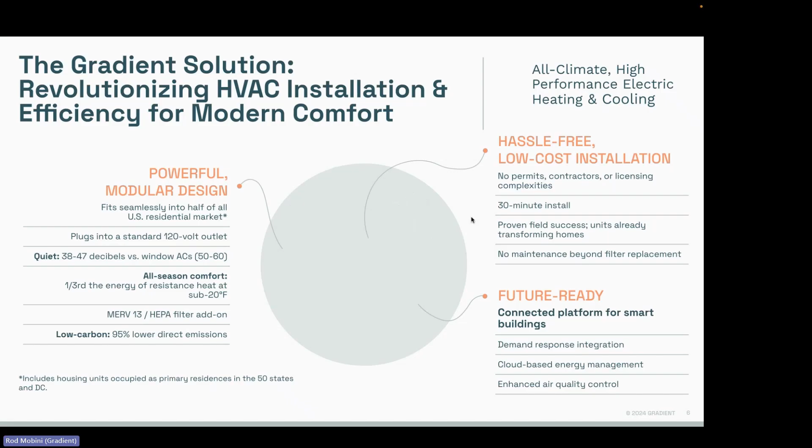This is our second generation product. It's called the all-weather 120 volt window heat pump. Like Bryant said, it brings together all of the functionality and power and user experience of a mini split heat pump with the ease of installation and lower expense of a window air conditioner. We really designed this with users in mind, not only the end users, but the building owners, the installers, the contractors, and spent a couple of years just learning about the needs of these different stakeholders.

All the feedback from our users and our customers resulted in a powerful and modular system that can be installed in over half of the windows in the US market. It's plug and play into a 120 volt outlet. Doesn't require any professional installs. It's extremely quiet, especially when compared to a window air conditioner that rattles your window. We've put a lot of time and effort there. It's rated down to -7 degrees Fahrenheit and is good for cold climates.

It's also industry leading for its air filtration in this product category. We've added MERV 13 filtration, which is the minimum requirement for schools, and it also goes to our purpose as a company. It's better for the planet too. It's approximately 95% lower direct emissions as a result of better refrigerants and a much more efficient system.

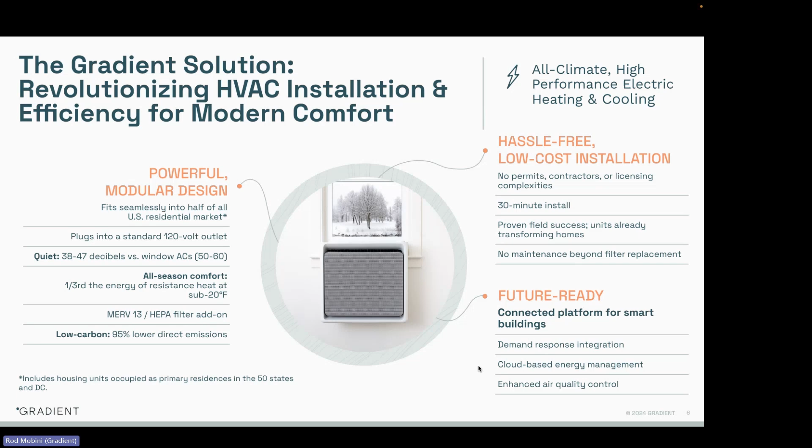And then the maintenance is extremely easy. There's an air filter and a condensate filter, and those are really the only regular maintenance that you would need to do on a unit like this. And these are also connected units, not only connected to the internet and to the cloud, but they can also connect to your building and to utilities to make this the smartest and best solution for our customers.

So just to go through a few of the features, you can see one of our installs here. This is actually at a NYCHA facility at the upper right. You can see this is the outdoor unit. Like I said, 30-minute install, no HVAC contractors required.

It's designed for cold climates, 9,000 BTU in both heating and cooling. It is a heater and a cooler with no resistive heating for space heating. And it can accommodate variable window depths. It also is using variable speed compressors and fans, so that makes it very, very energy efficient.

We've also designed it so that it doesn't take up the window. It hangs just below the window on the indoor side so that you have all of the natural light that you had before installing our unit as well. I mentioned it's 120 volts for a 15 amp outlet. So in most US construction, that's just your typical 120 volt outlet.

It won't require service interruptions, really is not a big nuisance to the residents to install, and it only takes like an hour of their day, and no drilling or permitting necessary. And we're using the best in class, or the best allowable refrigerant for the climate and for efficiency.

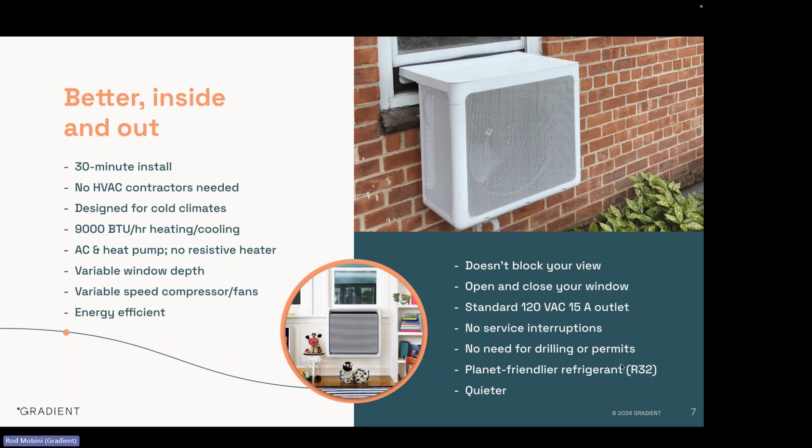Again, just highlighting a few more of the features of this product. It's about a 24-inch by 24-inch square on the inside and on the outside. The depth on the inside is about 8 inches, and the depth on the outside is about 14 inches. So the outdoor unit is a bit larger. We've put most of the internal systems on the outside of the unit.

The overall weight of the entire unit is approximately 125 pounds. The noise I mentioned earlier goes all the way down to 38 decibels at a 1 meter distance. For the electrical considerations, we recommend installing in a 15 amp circuit, but it won't consume more than 12 amps. And we provide a 6-foot cord already with the unit.

The unit also will have mobile app control, scheduling, and BACnet compatibility. It has cooling, heating, and fan-only modes. Again, 9,000 BTU heating and cooling. And then most importantly here, the energy efficiencies that we have rated so far.

These are relatively conservative at this point, but at 47 degrees Fahrenheit, we're getting a coefficient of performance of 4. So for every 1 watt of electricity in, it's 4 watts of heating out. That's equivalent to saying 400% efficient. At 17 degrees, 260% efficient. At 5 degrees Fahrenheit, 235% efficient. And at -7 degrees Fahrenheit, still 171% efficient.

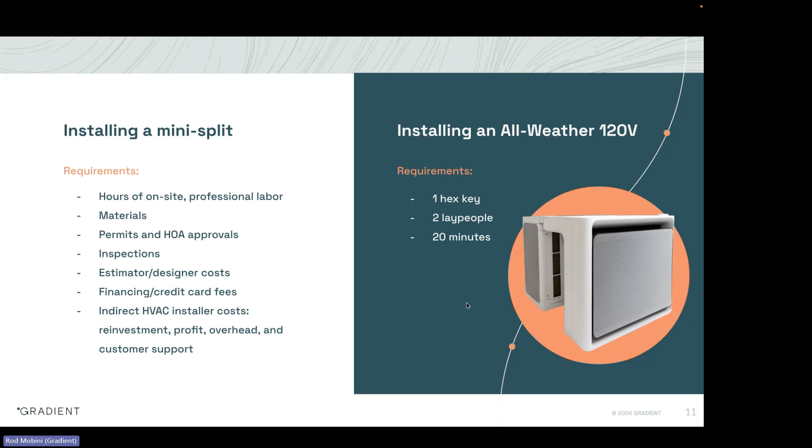So you can see the requirements of installing a mini split compared to our all-weather 120 volt are just incomparable. So just to show you now a visual of what an install looks like. You can find this video on our website as well, but I'll walk you through it here. So that's when it's fully installed. The unit will come in a box and you'll be able to unbox it, as you can see here.

Oh, pardon the Wi-Fi issues.

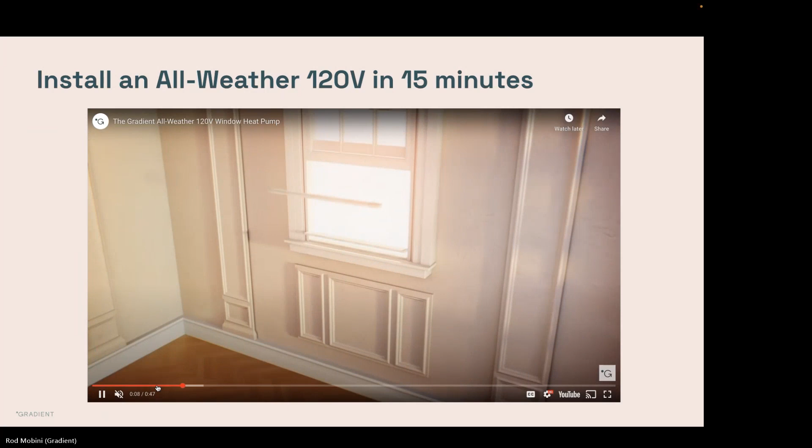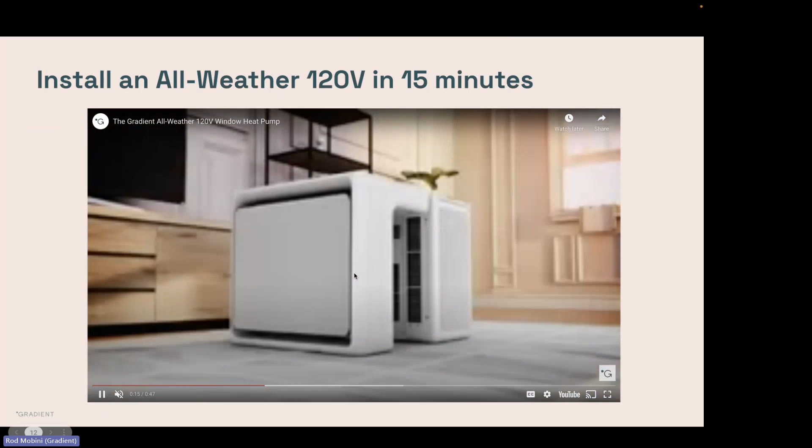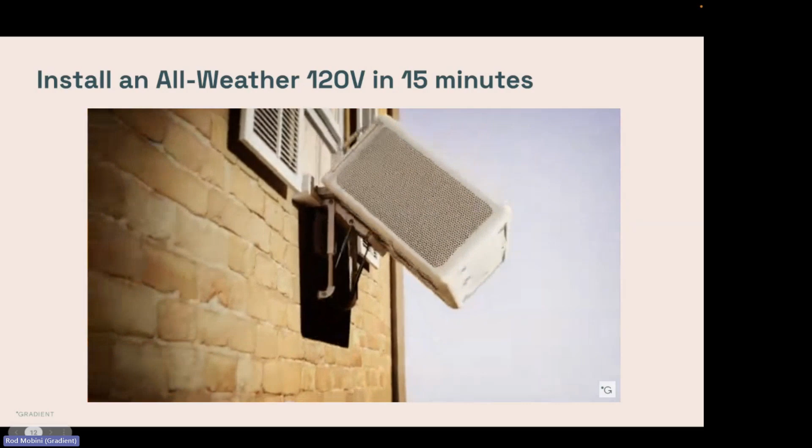Then you prepare the window and you put some sealing foams around, and you install the bracket, and then the unit can pivot 90 degrees, and then you have two people lifting on either side, and you gently lift it into place and push it out the window with our hydraulics to ease the drop there, and then you cover the top, close your window, plug the unit in, and you're done.

So now I want to talk a little bit about price, because we've taken our first looks at a comparison of price of mini splits versus a Gradient unit. For a relatively inexpensive mini split with a relatively inexpensive installation, we're seeing that our product fully installed will save consumers $2,000 per room, basically, or per 9,000 BTUs of heating and cooling. And these numbers are quite conservative.

We've seen mini split installations costing upwards of $10,000 to $15,000 per room, depending on where you live and who the contractors are. And so with our product, it's really all the cost of the product, and then the installation is quite easy and inexpensive.

And furthermore, mini splits would take you at fastest a couple weeks to get ordered and installed, but most likely months. A single Gradient would not take you more than a day at all, and you could install 10 Gradients in one day with no problem with the same team.

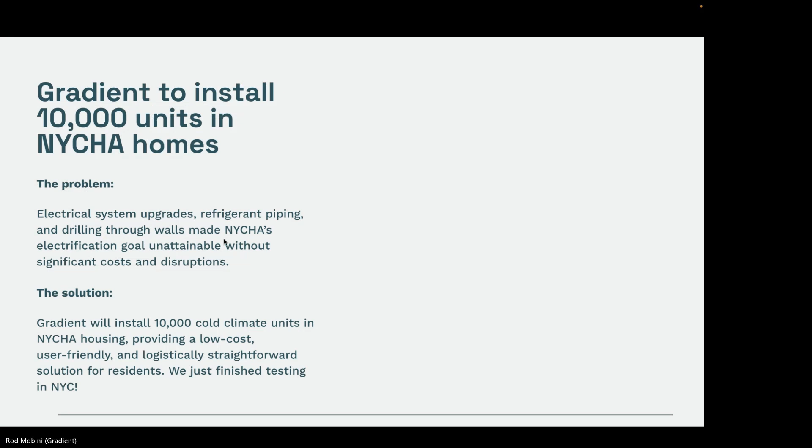So now we just wanted to jump into our work with NYCHA. About 2 years ago, NYCHA put out this Clean Heat for All challenge, which challenged manufacturers to come up with a solution that would solve NYCHA's problem, which was that they couldn't figure out a cost-effective way to electrify their heating and cooling, or heating in particular. And so they put forth a really revolutionary challenge here in collaboration with NYCHA and NYPA.

So we won. We're really grateful to have won, and NYCHA and NYPA have all been great partners for us. And we delivered 37 units to be installed in 12 apartments in NYCHA's housing in Queens. And so here you can see some of those units that were installed at that complex. And so it's basically half a building was decarbonized in less than 4 days. The heating and cooling was decarbonized.

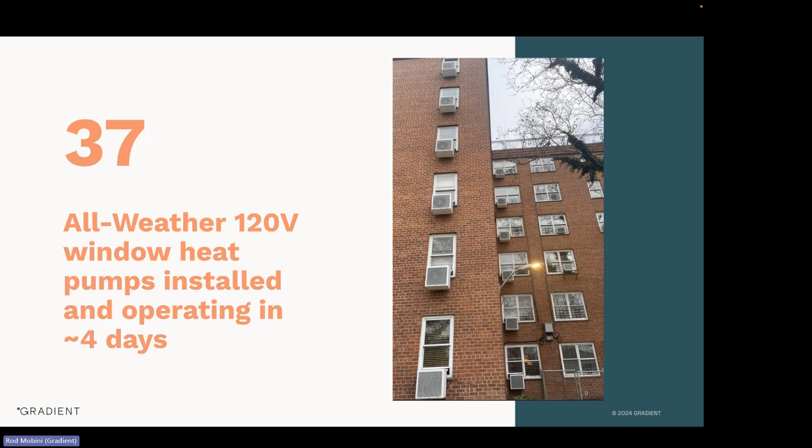So they removed the existing radiators and capped off the heating systems from the boilers, and relied only on these Gradient heat pumps for the entire winter time. And so these units are still installed and operating now through the summer as well, and the demonstration is going very, very well. And so I'll walk you through a few slides about that as well.

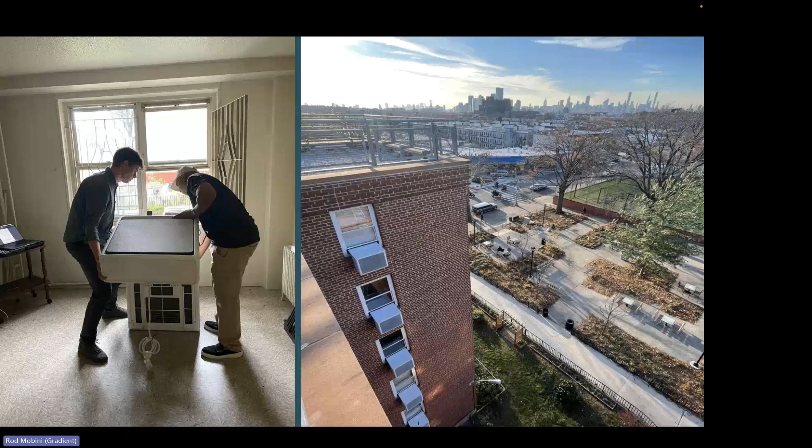Here you can see our CEO, Vince, on the left, and Bryant, my colleague that's on the call here, doing a sample install of one of these heat pumps into a NYCHA window. And then, what we care about the most is the experience of the customer. So that means the end user, that means the building owner, that means the installers.

And so, again, we installed 37 units in less than a week. The most time-consuming part of this was really removing the radiators, because NYCHA had to come in, remove the radiators, get their plumbers involved, and all of that. So that took most of the time, really, and the Gradient installs took less than one hour per apartment, with 3 units installed in each apartment.

And we trained their technician team that was doing the installs, and it took really less than an hour for them to be certified to install. We gave them our user manuals, but the install was so intuitive after they saw it once that they basically threw away the manuals almost immediately. And their team gave us really good feedback and told us that it was a great experience installing.

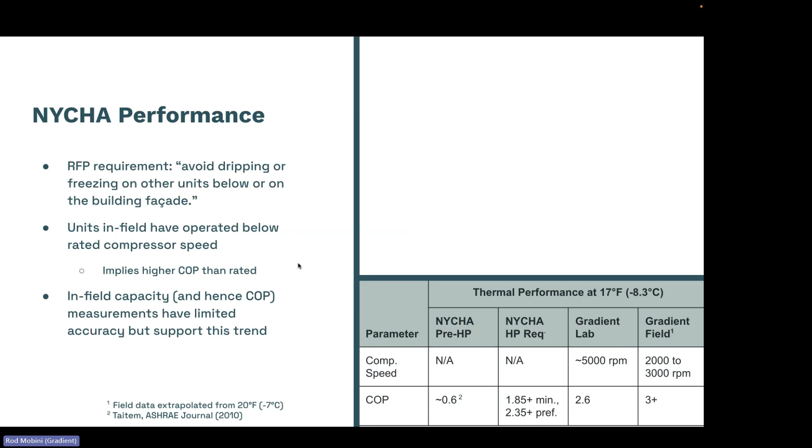So then just giving you a 2-minute warning here.

I am coming up on time here, so I'll briefly just mention, when it comes to performance, we've taken in a lot of data. We've innovated with what we call our water atomizer, which is on the outdoor unit. So any water that is produced by our units, whether it's condensate or melt water in the winter, will be atomized and blow away in the wind. So it's small particles of water that are blown away from the building by our unit's fan as well. So this is a really revolutionary technology as well, and I'm happy to answer any questions about it.

And then I just wanted to highlight here the updates in COP, like how much efficiency NYCHA is actually seeing. So from their existing systems that are about 60% efficient with the boilers, all the way to now seeing, at 17 degrees outdoor temperature, over 300% efficiency with our Gradient units in the field.

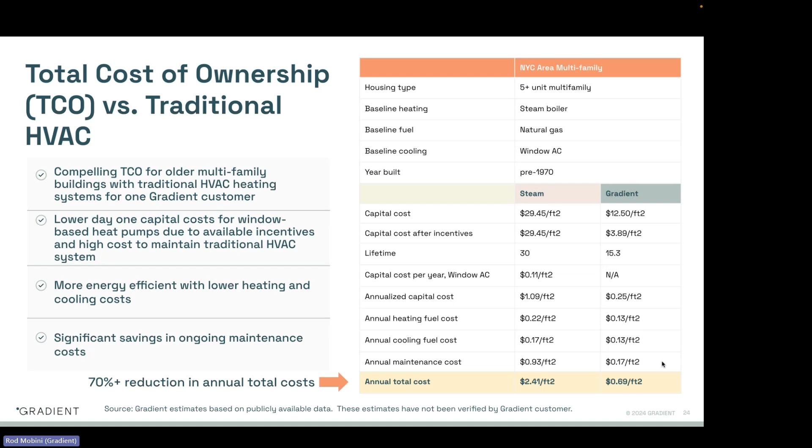And then again, we did a comparison of total cost of ownership to a steam system using natural gas in a multifamily building. And here you can see the annual total cost is about $2.50 per square foot for a steam system that is already in these multifamily buildings. And for Gradient, we're less than 70 cents per square foot.

There is a very high demand for our 2024 units. Pretty confident that we'll probably sell out of that initial 2024 inventory very soon. So if there's an interest, we definitely would recommend that you reach out to us. So on that note, we will turn it over to Saul to facilitate any questions.

Great. Thank you so much, Bryant and Rod. I see one question in the chat. Is NYCHA retaining the existing boilers for domestic hot water production in this case study? And are residents paying for heat after Gradient installation?

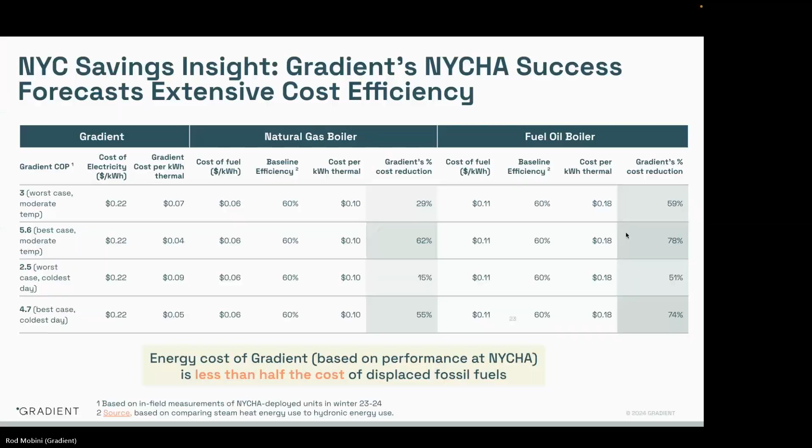And then your second question, the price. We currently, for large orders with businesses, actually, Bryant, maybe you can take this one. The price, yeah. Our MSRP now is $3,800. So we are currently selling at $3,800 a unit. So again, as Rod was alluding to, we're selling direct. At some point, if we decide to go through a third party, obviously that price could change as they set their own pricing. But as it stands now, the MSRP is $3,800.

Great. What are any maintenance requirements for the unit, like if there's an interior filter for circulating air or stuff like that? Yeah, there's two filters in the system. One is an air filter that a user could easily remove the front panel and wash or replace as needed. And then similarly, we have a condensate filter that a user could take off that front panel, which is very easy to remove. It latches off, and then take out the condensate filter and wash it. And the unit will tell you when that's necessary. Those are the two filters that are required for maintenance.

Any more involved maintenance, like if you wanted to clean your coils, which would be maybe every few years, you could easily remove the unit, do it outside or in a workshop, and then put the unit back in when you're ready. And it's, again, just a 30-minute install. So the only regular maintenance is those two filters.

Is there a model that's offered with backup electric resistance heat for colder days when you might not be able to meet the room's load? No, we don't have any backup electric resistance heat in our units, and they are rated to meet your heating needs all the way down to -7 Fahrenheit. So in the much colder climates, generally we've seen our customers will have a backup heat source like a gas furnace or electric baseboard that would only turn on if the temperature in the space isn't met by Gradient.